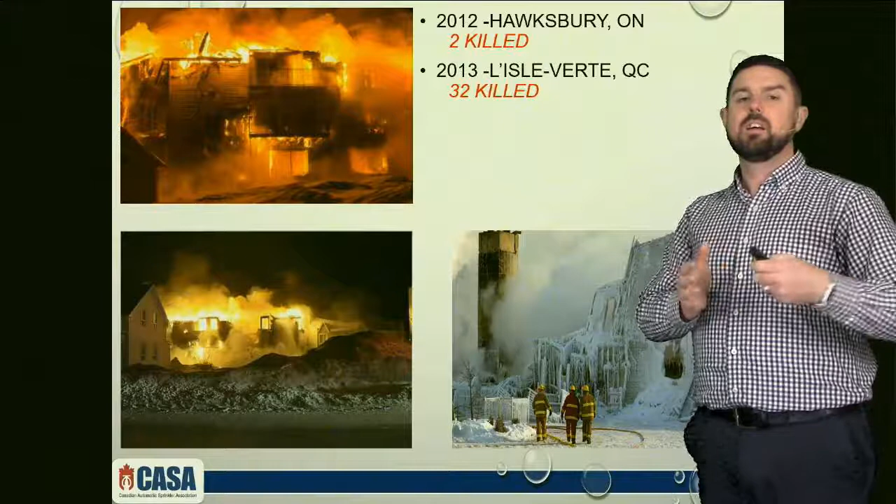On the side of the new addition with fire sprinklers, past the firewall, there were no deaths. Again, this is the importance of fire sprinklers in vulnerable occupancies and why it's part of the solution to the problem.

I'd also like to mention, in regards to history, the differences between home furnishings from a legacy type of home versus a modern home. The fire characteristics are drastically different. With a legacy home, the furnishings ultimately had more natural fiber, natural wood products, and very limited amounts of plastics, polymers and synthetics.

But when you look at modern home furnishings, it's a little different. The building materials and building contents have drastically changed. Increased use of recycled materials, environmentally friendly materials, and more affordable goods. Increased use of synthetics within the materials used. Polymers, plastics, even lithium-ion power banks and power supplies within these homes. And also petroleum-based materials, increasing the fuel load, and the fire behavior of these materials is much different.

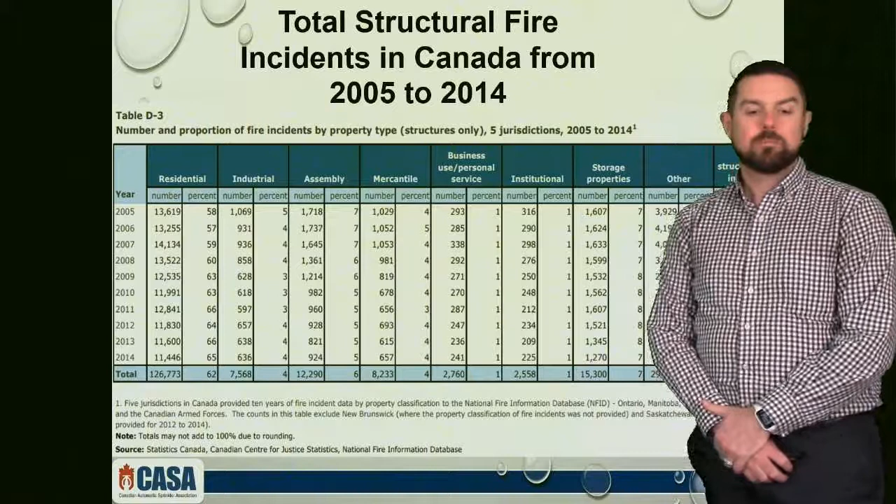Now we're moving on to total structural incidents in Canada from 2005 to 2014, the number of structural fires pertaining to the specific type of building. If you look at the stats, 126,773 fires occurred in a residential occupancy, which in most cases is very similar to a vulnerable occupancy, but they're not the same, obviously. This is where most of the fires occur, 62% to be exact in Canada from 2005 to 2014.

I'd also like to point out that these statistics were given by only 5 jurisdictions: Ontario, British Columbia, Manitoba, and the Canadian Armed Forces and Alberta.

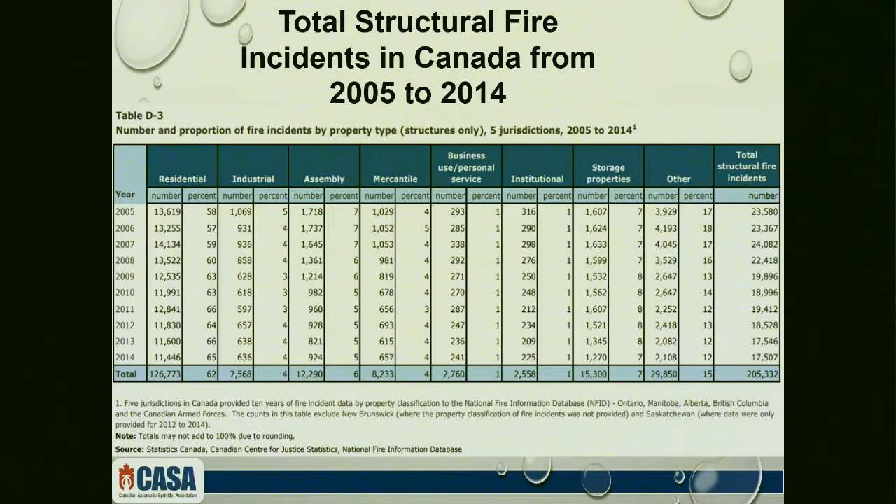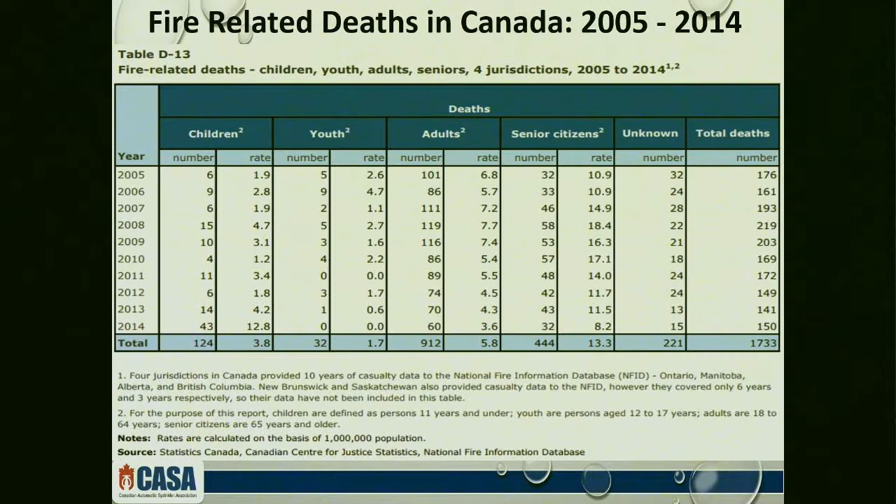I'd also like to point out burn patients' healthcare costs. So obviously there is cost involved with fires. Always will be. There was a study done by Sunnybrook, which was published by the American Burn Association. And here are some of the statistics in 17 years from the Provincial Burn Center from 1995 to 2012.

What was determined was the average cost per patient is about $85,000. The total burn center costs alone is $96,448,194. And then the total calculated cost in Canada as a whole with burn patients' healthcare cost is $3.6 billion. I'd also like to note that the approximate burn injuries per year in Canada is about 45,000 people. And out of that, requiring hospitalization is 2,000.

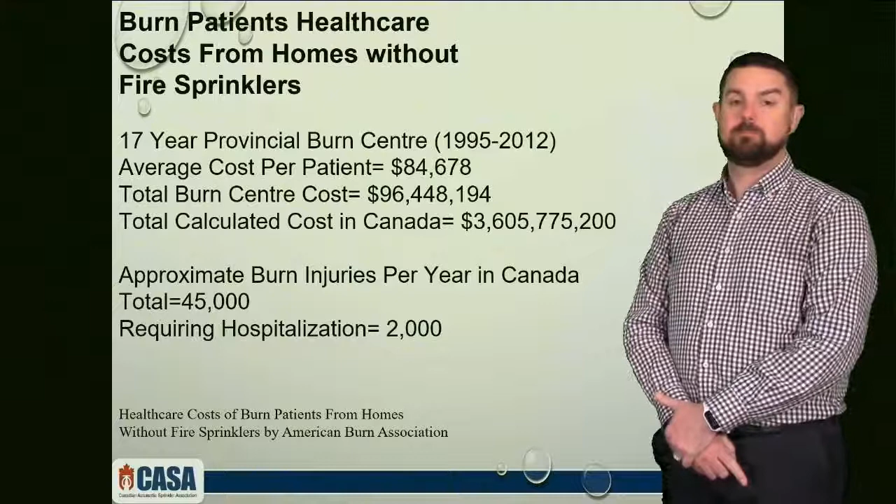Now, I would like to talk about the Ontario Regulation 150/13 amendment, which was amended in the 2015 Ontario Fire Code. This Regulation 150/13 was filed on May 9th, 2013. And that's where the 13 comes from. And the 150 is the number of regulations that was done in Ontario. So it's the 150th regulation in 2013. And the enforcement started January 1st, 2014.

Within the Ontario Regulation 150/13, Ontario Fire Code Section 9.7, it affects the retirement homes regulated by the Retirement Homes Act, care occupancies, and also care and treatment occupancies except for hospitals. Part 9 of the Ontario Fire Code also includes Section 9.5, buildings up to and including 6 stories in building height with residential occupancies, Section 9.6, buildings higher than 6 stories in building height with residential occupancies, and also buildings with a care occupancy or retirement home.

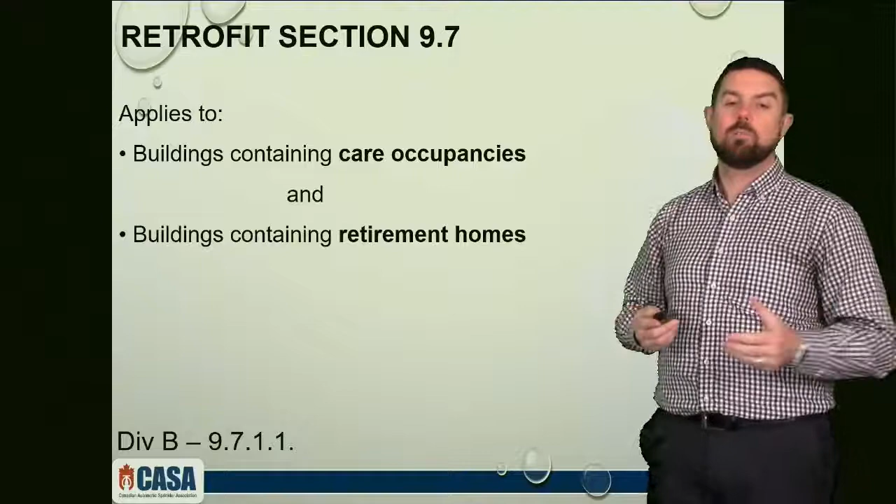So the compliance date for the mandatory requirement of fire sprinklers in long-term care homes and homes for special care containing care or care and treatment occupancies is January 1st, 2025. Also, the retrofit Section 9.7 applies to buildings containing care occupancies and buildings containing retirement homes. Buildings up to 6 stories high must satisfy the technical requirements of Section 9.5. Buildings over 6 stories high must satisfy the technical requirements specified in Section 9.6.

Now we're leading up to basically what is a retirement home. So a retirement home is basically a home that requires a license. A license is required for a business that has to meet the Retirement Homes Act and the retirement home definition. With that, the Retirement Homes Act definition is basically as follows.

A retirement home is regulated under the Retirement Homes Act 2010, regardless of whether it is a care occupancy or residential occupancy. The retirement home complex, or part of the retirement complex, is basically where people occupying these facilities are primarily people that are 65 years old or older. It is also occupied and intended to be occupied by at least 6 persons not related to the operator. And also the operator makes at least 2 different types of care services available.

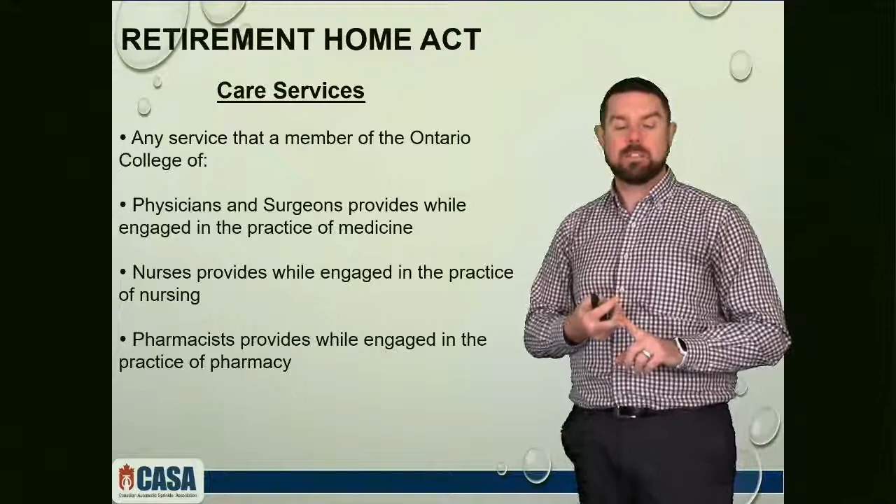With those care services, it's basically any service provided by members of the Ontario College of Physicians and Surgeons while engaged in the practice of medicine, nurses while engaged in the practice of nursing, and pharmacists while engaged in the practice of pharmacy. The care services can be as follows, so basically 2 of these care services.

So it could be administration of drugs, assistance with bathing, assistance with dressing, provision of a meal, assistance with feeding, continence care, assistance with personal hygiene, assistance with ambulation, the provision of a dementia care program, and the provision of a skin and wound care program.

Now with that, if you do fall under a retirement home, as I mentioned, you have to apply for a license for that. And ultimately, all these facilities are listed on the public register at the following website: www.rhra.ca/en/search-the-public-register/. If a retirement home does qualify as a retirement home, you will find that home on that website. And if you see that a home is classified as a retirement home and it's not registered as such and not on the website, then ultimately that's a problem and needs to be addressed.

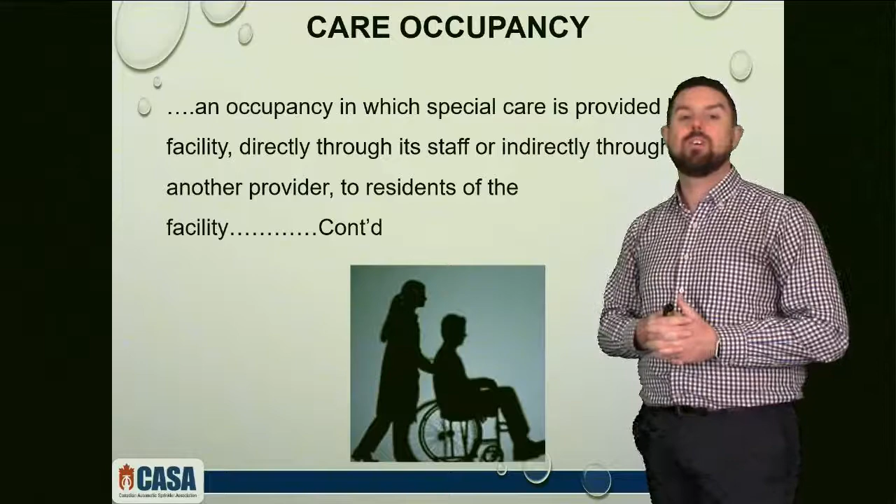Care occupancies. So we talked about retirement homes; now we're talking about care occupancies. A care occupancy is basically one in which special care is provided by a facility directly through its staff or indirectly through another provider to residents of the facility who require special care because of cognitive or physical limitations, and who, as a result of those limitations, would be incapable of evacuating the occupancy if necessary without the assistance of another person.

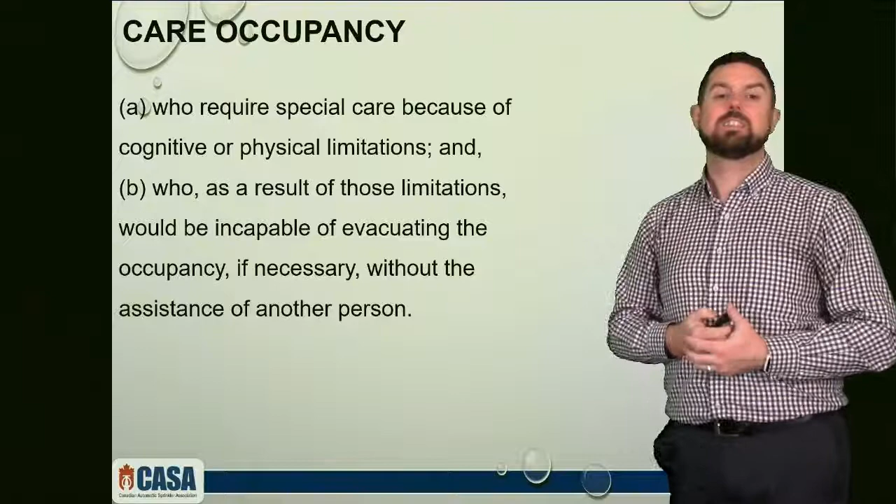Long-term care homes are basically a place where adults can live and receive help with most or all daily activities, with access to 24-hour nursing and personal care. Basically, you can expect much more nursing and personal care here than you would typically receive in a retirement home or supportive housing.

Now, a care and treatment occupancy, which is a healthcare facility, is basically an occupancy in which persons receive special care and treatment in a healthcare facility. Some examples of healthcare facilities include public hospitals, private hospitals, and nursing homes.

The only way to fix this problem is to discuss these buildings with your authority having jurisdiction so this can be rectified. And also, please contact any CASA member for any assistance in regards to your building for fire sprinklers.

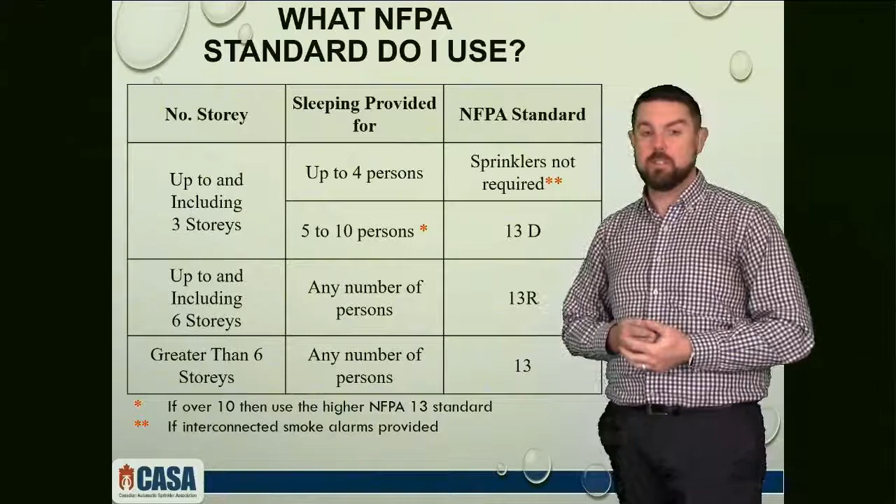So here are some fundamental differences with the water that's required for each one of these standards. So 13, 13R, 13D. Depending on the design method, the design area shall be the area that includes 4 adjacent sprinklers that produce the greatest hydraulic demand, plus a 100 GPM required hose stream, and you also have to have a water supply of at least 30-minute duration. So those are the NFPA 13 requirements.

Now the next standard below would be NFPA 13R, whose water supply requirements are as follows. You have to calculate a minimum of 4 sprinklers, and the designer must ensure that it's either the largest floor area or the largest demand. Those 4 sprinklers could be a demand of 4 sprinklers spaced 12 feet by 12 feet. That could be more demanding, but it may not be as demanding as 2 20-foot by 20-foot sprinklers. So you've got to look at the largest floor area and the largest demand. You may have multiple calcs in this aspect.

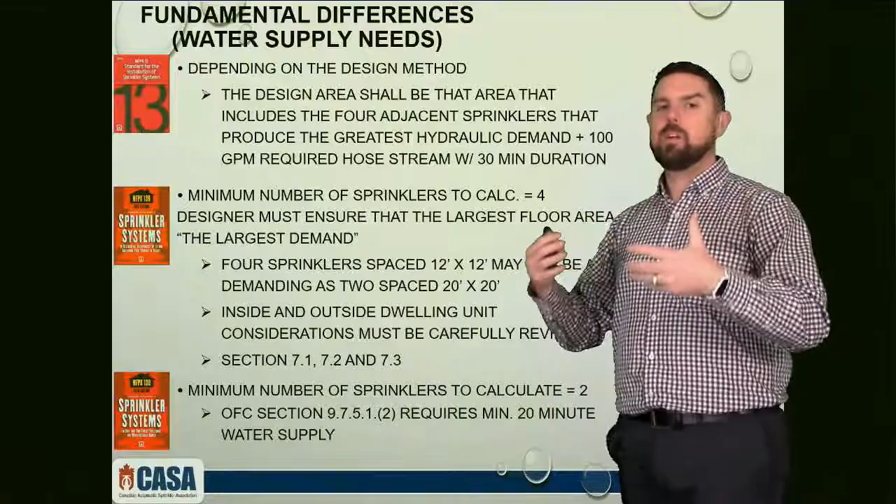And just a little tidbit of information as well. For everyone to understand, the building code will always trump the NFPA standard. I'll say it again: the building code tells you when to do something, and the NFPA standard will tell you how to do something.

Moving on. So I made a little chart that shows some of the differences between NFPA 13R versus NFPA 13D. On the left side of the table, you have the NFPA standard, the purpose of the standard, the water supply, the component listing requirements, pipe and fittings that can be used, underground piping, fire sprinklers, fire department connection, and alarm detection.

Now NFPA 13R and 13D systems provide a sprinkler system that aids the detection and control of residential fires and thus provides improved protection against injury and life loss. That's mainly the purpose of 13R and 13D. With NFPA 13, the main purpose is not only life, but also property. So it protects the property and the life, to help the people get out of the building.

So with that as well, we talked a little bit about the water supply requirements. The water supply requirement for 13R is 30 minutes. It's the same for 13 as well. And as I mentioned, for 13D, the main requirement for the water supply for an NFPA 13D in a vulnerable occupancy using the retrofit legislation is 20 minutes as per the Ontario Fire Code, Section 9.7.

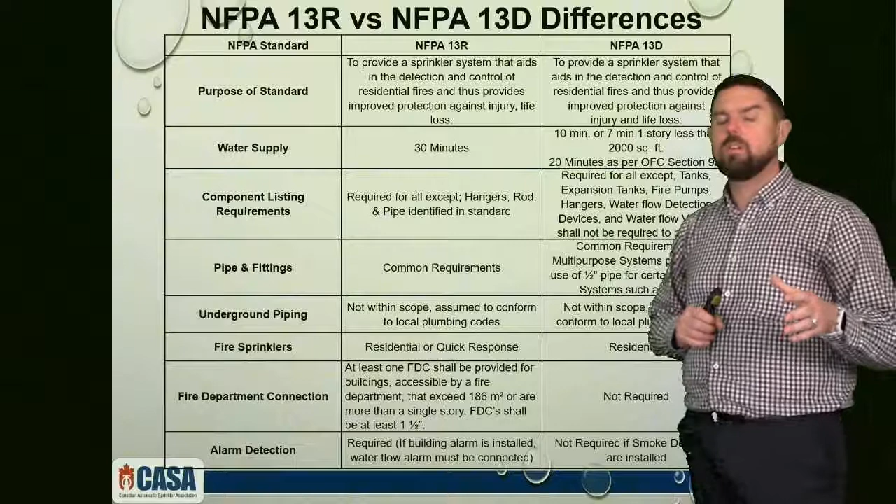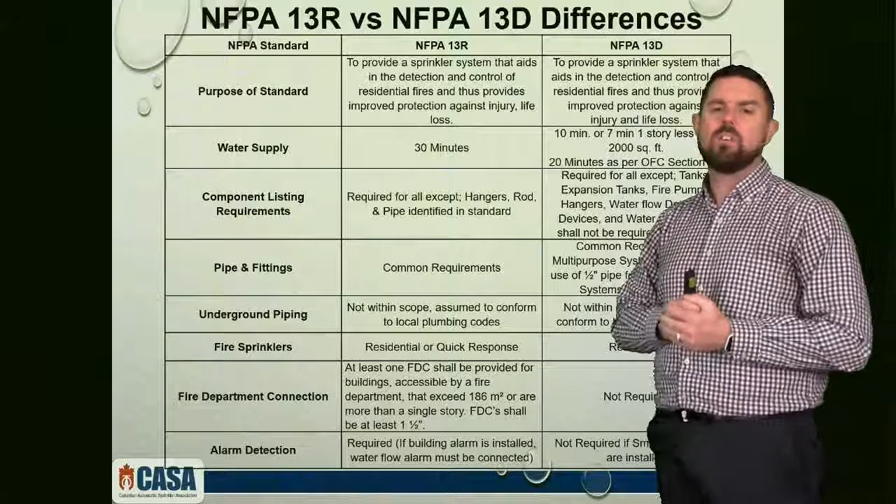Also, fire department connection requirements. A fire department connection is required for 13 systems. In most buildings, it's usually a 4 by 2.5 by 2.5 Siamese connection. It's different for NFPA 13R. With 13R, it depends. At least one FDC shall be provided for buildings that are accessible by a fire department where it exceeds 186 square meters or is more than a single story. The FDC shall be at least a 1.5 inch FDC. Now for NFPA 13D, there is no requirement for a fire department connection.

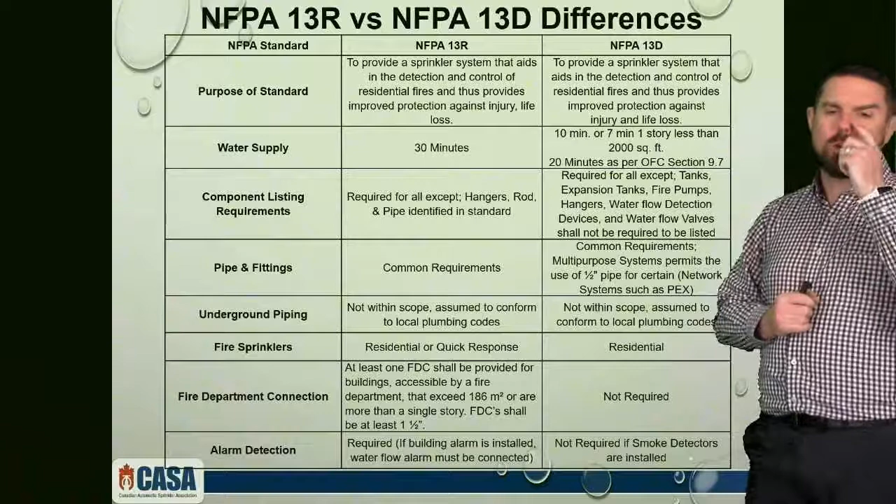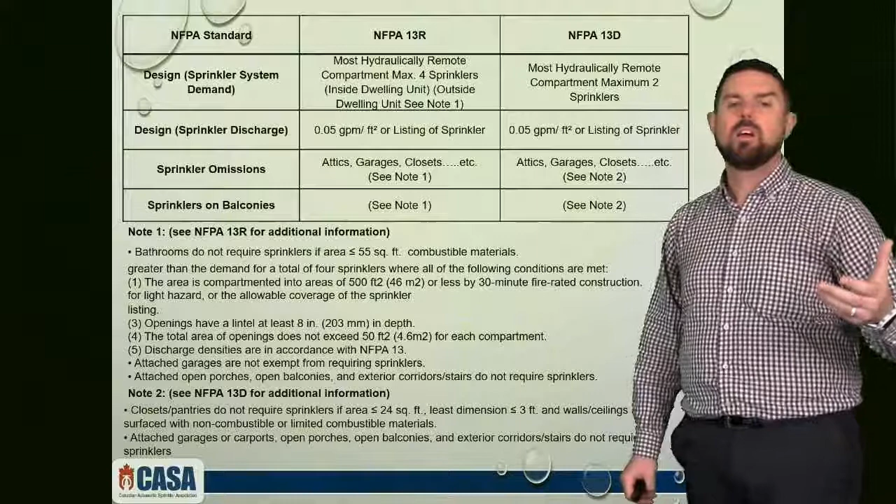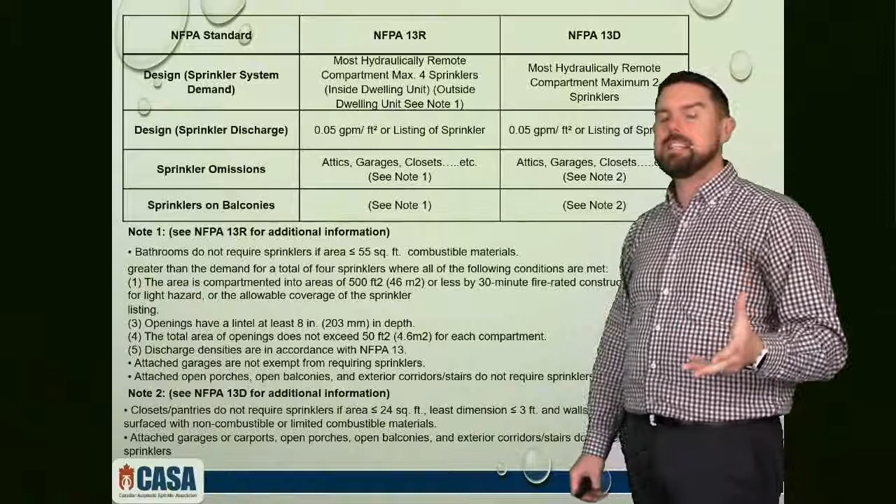Some more information on the table. Again, the design, we talked about that. For NFPA 13, it's the most hydraulically remote area, usually the highest or farthest away from the incoming water supply. For 13R, it's the most hydraulically remote compartment with a maximum of 4 sprinklers inside the dwelling unit. Outside the dwelling unit, see note 1. And for NFPA 13D, it's the most hydraulically remote compartment with a maximum of 2 sprinklers.

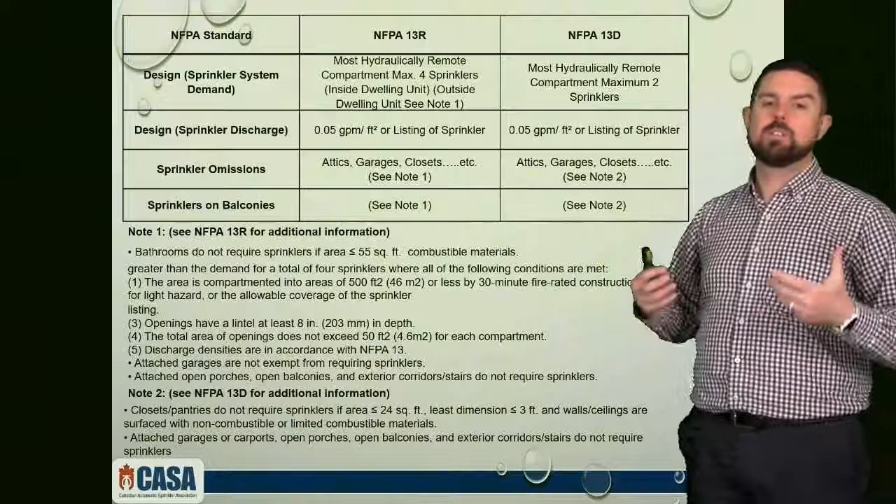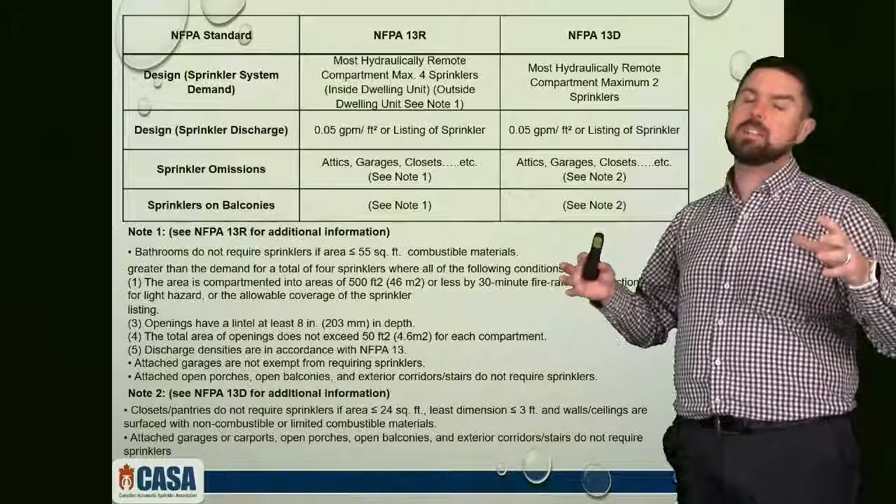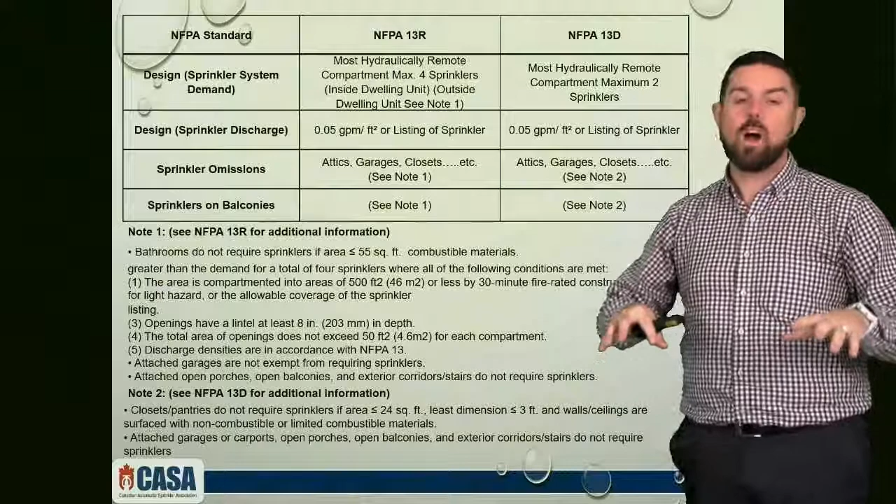And then the design, the amount of water that needs to be produced, is 0.05 gallons per minute per square foot, or the listing of the sprinkler, for 13R and 13D. And for NFPA 13, it's 0.10 GPM per square foot, or the listing of the sprinkler. When we're talking about 0.05 gallons per minute per square foot, it's basically the amount of water going from the sprinkler head to the floor. That's the minimum required to flow from the sprinkler head to the floor.

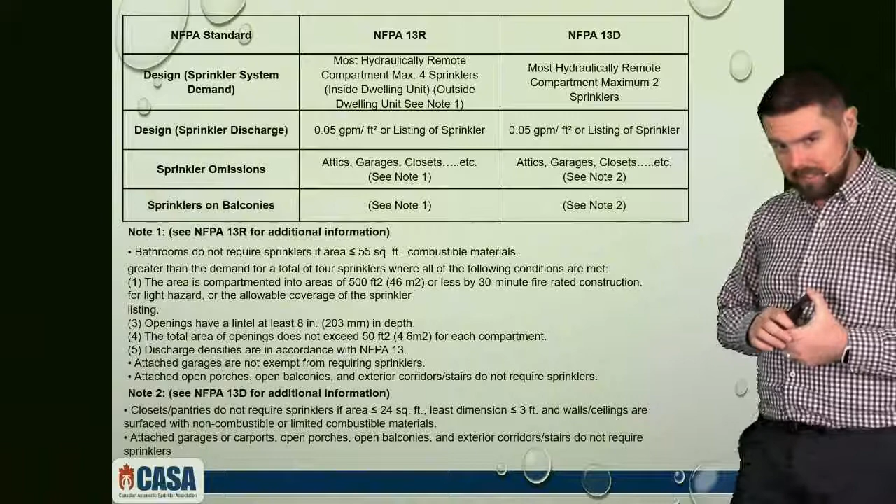Also, the sprinkler omissions for 13R and 13D: attics, garages, closets. Again, see Note 1 for 13R, see Note 2 for 13D. And then sprinklers on balconies. Again, see Note 1 for 13R and Note 2 for 13D.